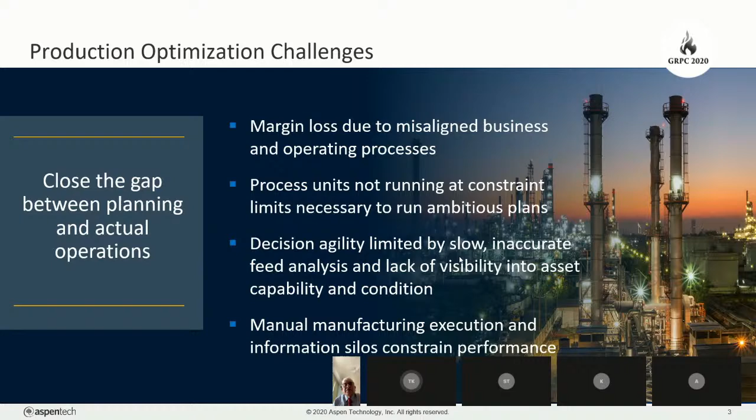For example, we implemented our PIMS advanced optimization platform at a global energy and chemicals company across more than 15 sites. At Rompetrol, we had cumulative benefits of more than $45 million US over a period of 5 years by implementing our advanced process control technology.

So, having said that, I believe there's a gigantic opportunity still to deliver value when you look at production optimization in an integrated fashion.

Let's go to the next slide. So this is our digital reference architecture, a holistic approach to asset optimization.

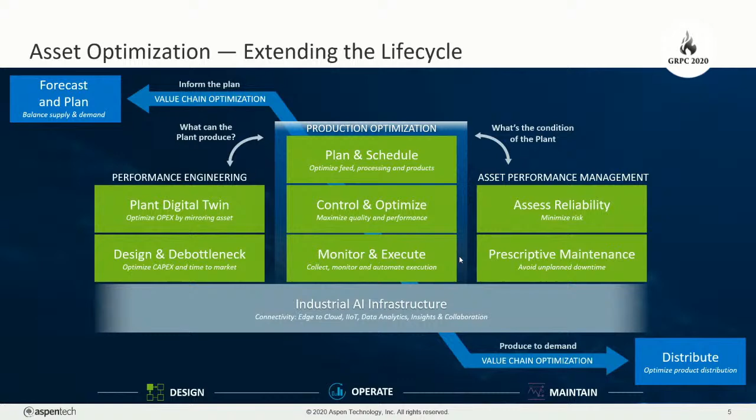And leveraging the new AI infrastructure that AspenTech provides, we believe we can drive new levels of collaboration, but specifically insights and automation across all these functions by providing industrial AI infrastructure to all our applications, so we can help our customers achieve a higher level of asset optimization and ultimately unlock the smart enterprise. But for today, I'm going to focus on the production optimization bit.

And production optimization is really the fundamental building block for a future smart enterprise or self-optimizing plant vision.

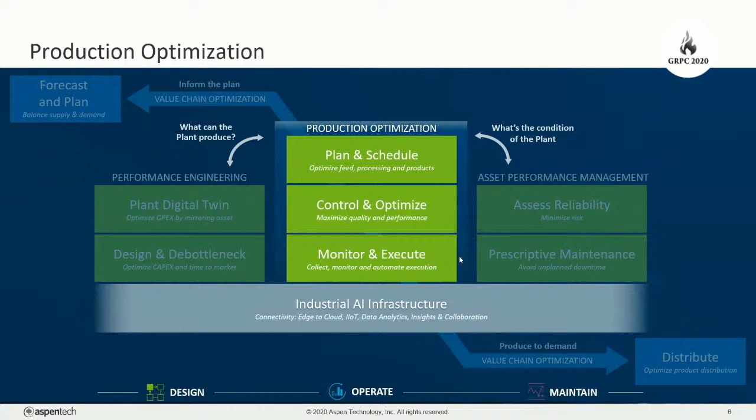So if we look at the production optimization solution, it helps address margin leakage across your supply chain by connecting all of these business processes into an integrated workflow, as you can see here. Our production optimization is a unique solution that provides a holistic, integrated solution that unifies all these different functions.

So when we look at the different layers, the first one is the digital twin. Is your planning model up to date? Do we have the latest representations in our LP? Do we have a tool available that can use machine learning and smart algorithms to provide timely failure alerts?

And that could feed into the planning and scheduling layer, where we do feedstock purchasing and scheduling. We adjust the operation based on day-to-day disruptions, which could be maintenance related, feed logistics, or product downstream delays that could cause the plan to not be achievable, and schedulers then have to re-optimize the plant. That's why we see planning and scheduling hand in hand throughout the operating life cycle of a manufacturing plant.

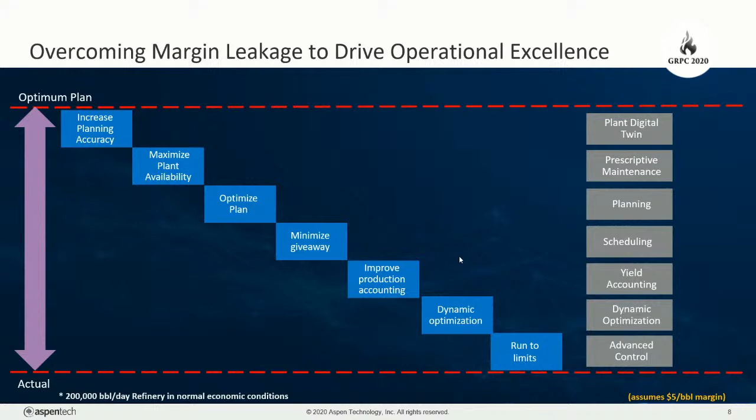This is based on our internal experience with many clients globally, and it's indicative. What you can see, for example, if somebody would not have an integrated planning solution in place, is that the margin leakage could go up to 50 cents a barrel, and the synergy between all these different functions, we believe, drives very high values and goes into the tens of millions of dollars per annum, depending on your complexity and depending on the throughput of your plant.

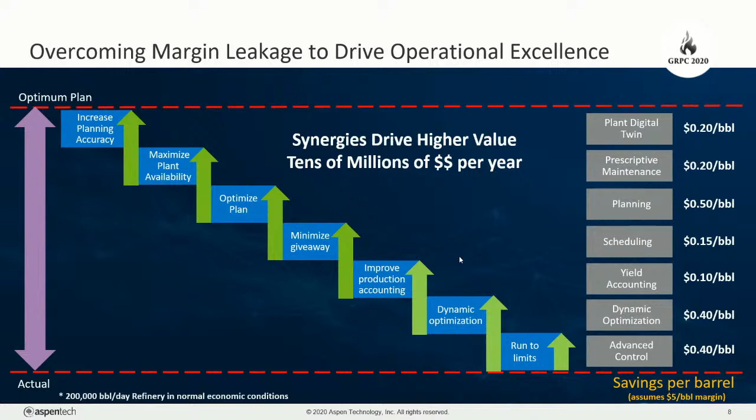Okay. And I think this is a very, very compelling reason to minimize margin leakage.

And this slide, our GDOT solution, it's basically a platform that is used to solve a variety of coordination, but also optimization problems in refining and olefins.

So the GDOT models themselves, they derive from our planning models. So, for example, FCCs, hydrocrackers, reformers. And so the reactor models in GDOT are similar to refinery LP models, albeit that we actually include non-linearity there where we feel that is beneficial, such as a conversion unit, an FCC, or a hydrotreater for that matter. And so they are more detailed models than you would typically find in an LP model.

And for this reason, GDOT actually incorporates best of both worlds. On one hand, it's similar to LPs, but on the other hand, we incorporate more detailed and complex models to accurately represent the units. And as you can see here in the scheme, it's a closed loop optimization.

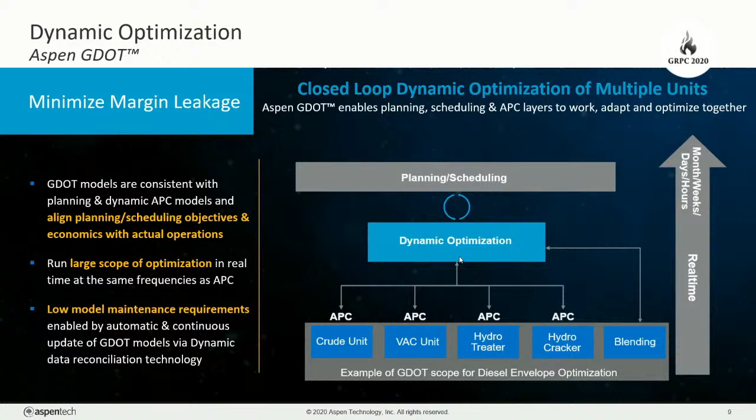Here you see an illustration of our gate-to-gate scope of optimization, and as you can see, here's a middle distillate envelope.

Our solution actually is a flow sheet driven interface with a standard database for different process units, and so setting up these models will allow consistency with planning and scheduling as they are in the same application. These pre-configured templates also simplify the maintenance for the user and allow them to focus on analyzing the results rather than complex model integration.

So what are some of the key success stories? In distillate processing, we've shown to increase overall diesel production by 10% at certain clients, and also reduce the average quality giveaway, and this was worth $4 million to $10 million per annum.

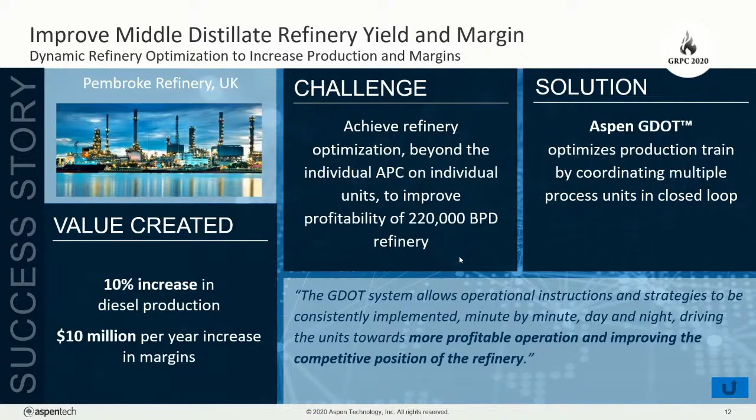Finally, if you remember, I presented the digital architecture earlier, and another key dimension is asset performance management. Unfortunately, today I only have 10 minutes, so very quick.

Actually, with our asset performance management, we can expose the condition of the equipment or process by making prescriptive maintenance information available to the planning department. This enables you to plan interventions ahead of time, to either reduce the maintenance cost or improve the margin leakage that could be caused by an unscheduled event, because you can plan for it well in advance.

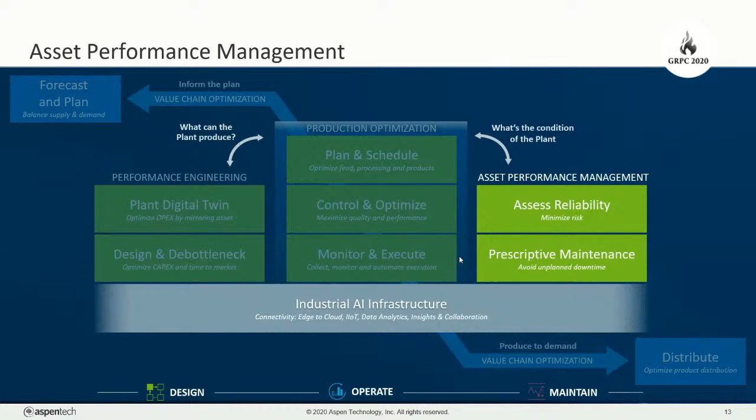An example of that was at Saras. They wanted a reliable operation of their refinery with their integrated power plant, and their strategic objective was to improve uptime but also decrease maintenance costs.

And we at Aspen installed or deployed Mtell as part of this endeavor in just a couple of weeks, and we built failure detection agents across a whole set of critical equipment.

As a result of that deployment of our Mtell solution, which uses artificial intelligence and machine learning to predict failures, we had a 91% detection accuracy with at least 30 days of lead time before a piece of equipment failed.

So at the refinery, one statement was that they positively improved reliability in 91% of the cases, and this led to a reduction in maintenance costs, as well as avoiding emergency or so-called unplanned shutdowns, and they could actually re-optimize their operation. Okay, so that's a very brief overview.

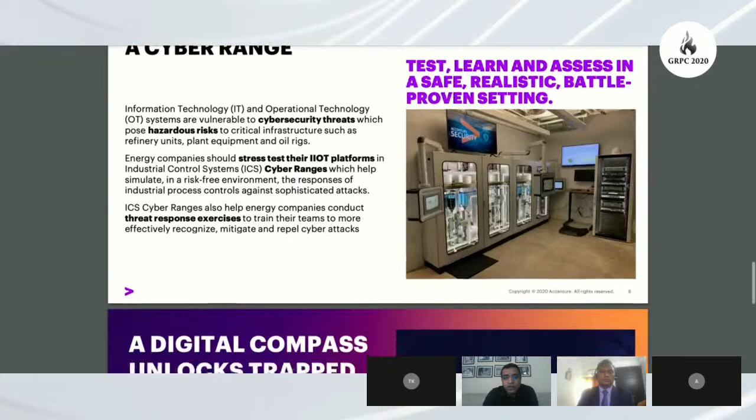I'm not talking about specific use cases, but if we talk of downstream refineries, we have enough proven use cases in process analytics and machine analytics. I'll extend that to even lubricants, where there are applications around developing a platform, either adopting a platform strategy or digitizing existing front end and back end operations. Similarly, it is true for fuel retail and marketing.

What I want to summarize in my last slide is three aspects. One, there has been a lot of progress as far as digital implementation is concerned in the downstream sector. However, what we currently have as proven models is simply scratching the surface. There is a lot more that needs to be identified and invented as far as use cases are concerned. As this technology takes its journey and becomes more mature, we'll uncover more and more. But there is enough to go on to start with, which will give confidence to executives to take the plunge. So that's point one.

Point number two is the digital journey is as much an organizational and cultural transformation journey as it can get. Trusting a digital model beyond your own gut and instinct will take time, and companies will have to really focus on organizational change management, executive sponsorship, etc., for some of these initiatives to really succeed.

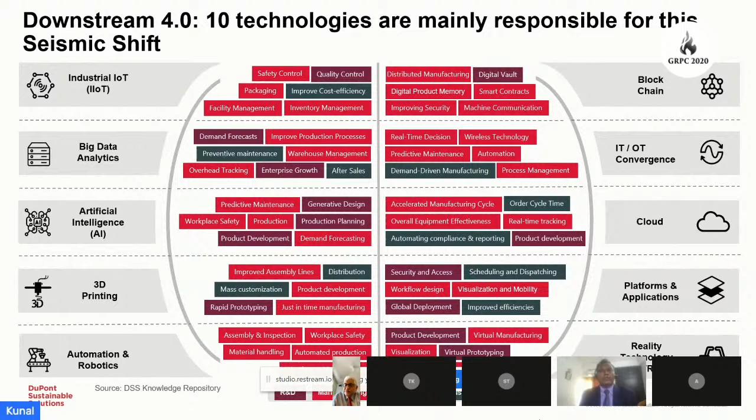And then the why and how part - is that understood even by the management? What are the implications of not transforming, of not adapting to completely new ways, of not taking the bold step to transform the organization? And how to do it in terms of process, technology, and more importantly, people - how to develop a culture of change which is accelerating.

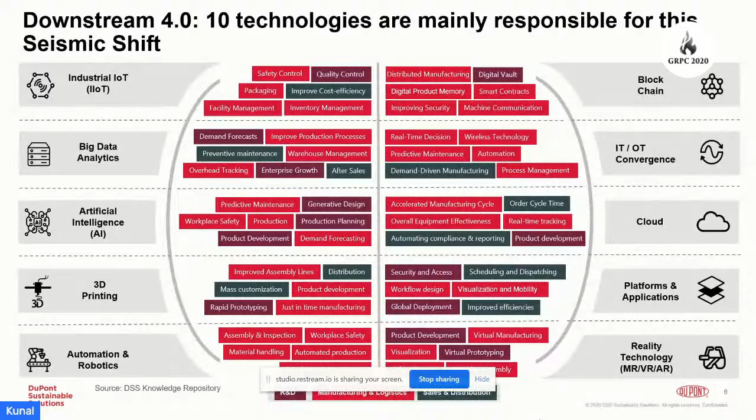A lot of leaders are having a thought around culture and making it one of the key aspects of the transformation that is coming in. Because culture transformation is an implicit part, and often the part which makes success a reality. Without cultural transformation, success can never be achieved.

At DuPont Sustainable Solutions, we leverage the DuPont experience to derive insights on mindset and culture transformation. At DuPont, we have experienced 4 industrial revolutions, starting with mechanical production and to date with the new technologies coming in. And so we derive our best practices, learnings, and methodologies from what we have seen during this course of time and what we have learned and implemented.

In our perspective, there are 3 critical challenges for companies to overcome to achieve the full potential of Industry 4.0 digital transformation. First is a vision and mindset around digital maturity - a lack of digital transformation strategy or roadmap. Is it understood across the organization? Do they have a vision of how to redefine doing new things, with technologies as enablers?

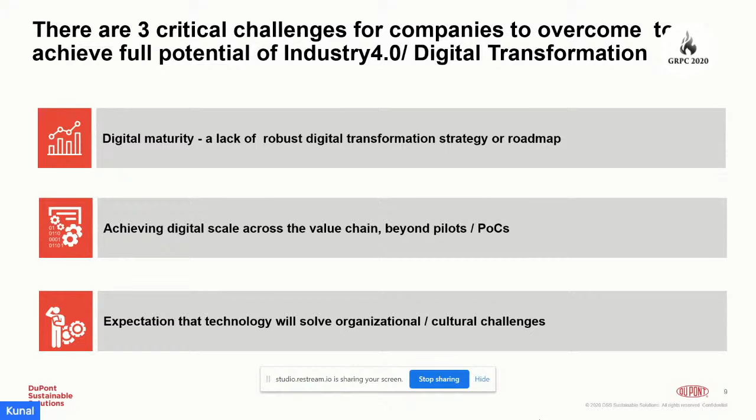I'm taking a case of a digital transformation roadmap for a refinery. It begins with business at heart and people at the center.

First and foremost, across the value chain, we define the critical functions that are there. In this case, we have taken 14 functions, and then we have bucketed more than 50 domains which are there in the organization or refinery under those functions. For example, if we take maintenance and reliability, we have bucketed 5 domains of turnaround, equipment performance, and so on and so forth under it.

Why is it important? Because we need to understand what digital interventions are required in each of these domains, what competencies and mindsets the frontline personnel have in each domain, because they generally are at different varying maturity levels in the organization. What needs to be planned to bring them to a level, and what kind of implementation can be done?

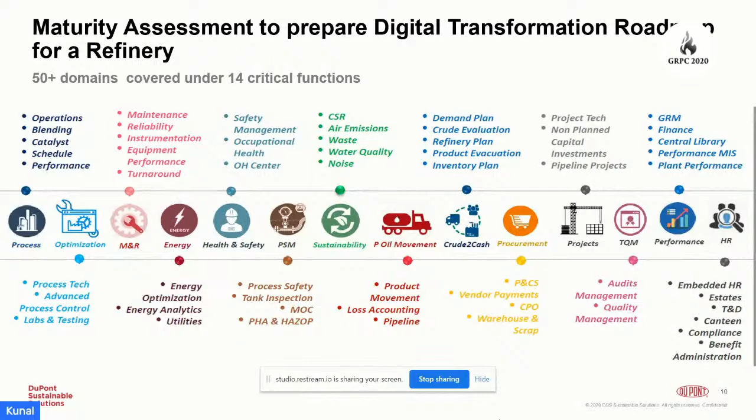The approach we adopt is in terms of process maturity and digital maturity, with the people aspect inbuilt in both process as well as digital.

For example, for a low process and low digital maturity, in an organization where the processes are not really matured, we need to enhance the process, find the gaps in the process, enhance them, and enhance the systems. Accordingly, the competency of the people also needs to be enhanced to that level to make it a success.

Going to the second dimension, high process maturity but low digital maturity in these domains, we need to upgrade the systems and let people know what upgradations are required and how the systems will function.

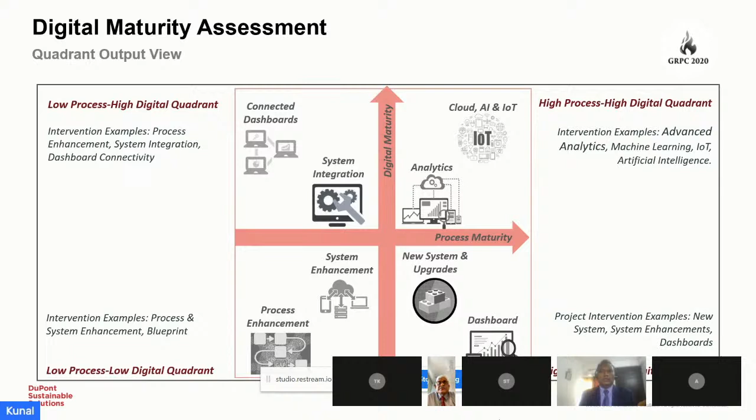Similarly, on low process maturity and high digital maturity, we try to do a system integration, a dashboard connectivity, so that people can understand how things are integrated and enable the functioning of the processes accordingly with the digital maturity available. The final quadrant of high digital maturity and high process maturity requires significant efforts in terms of competency building and deployment of technologies, be it advanced analytics, machine learning, Internet of Things, or artificial intelligence.

After doing this whole piece, assessing each domain onto this methodology, we also do a business criticality assessment of each of these domains in terms of how critical it is from a business standpoint, so as to prioritize the investment in implementation.

We do an assessment including people as a part of both process maturity and digital maturity, and then by talking with people, getting their views, and understanding from a business standpoint, we give a business criticality score to each of these. We then define the interventions required in each domain under a particular function, going across for all functions and then enterprise wide across the value chain.

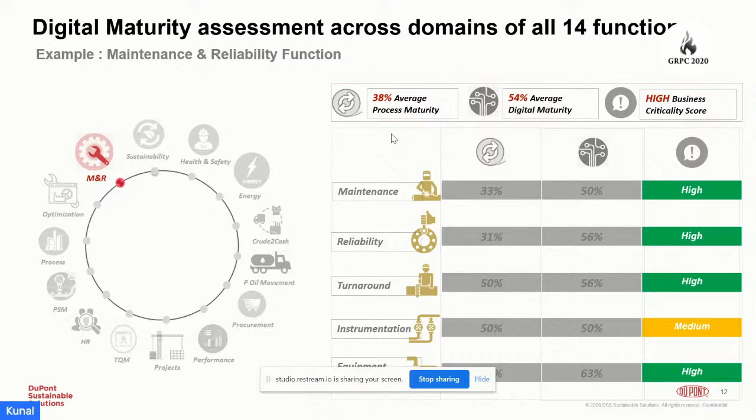To showcase an example of how the digital interventions are done and plotted: in the maintenance and reliability function, a total of 15 challenges were identified along with the people in that particular function.

Then 7 digital interventions were... Hello, Kunal. Yeah, this is your chairman speaking, session chairman speaking. Could you please wind up in another 2 minutes, because we are... Sure, I'll go a bit fast. Yeah, please. Thank you, sir.

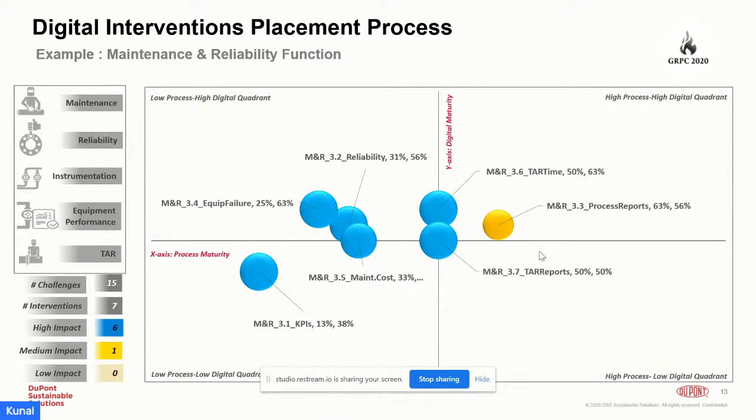So then we placed around 7 digital interventions, 6 of which had a high impact on the organization and 1 had a medium impact, be it turnaround time, process reports, and so on and so forth.

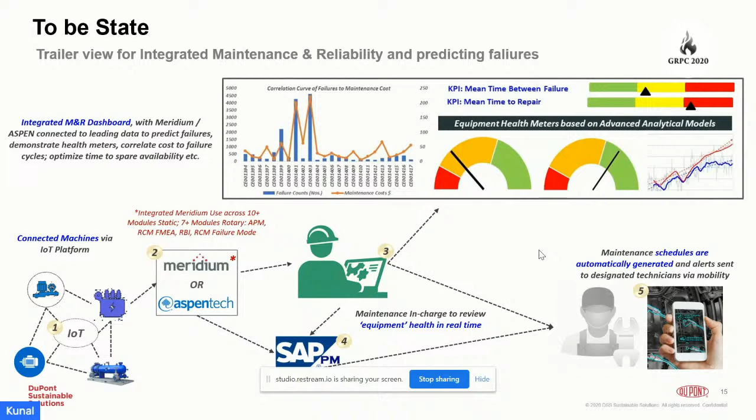From a digital assessment perspective, since we took the case of maintenance and reliability, the suggestions for IoT came up - integrating them with the asset management software so that the maintenance in charge can get equipment health in real time through KPIs, demonstrated health meters, correlate cost to failures, predictive failures, and frontline maintenance personnel can automatically get generated schedules and alerts to take action.

We did it across all 14 functions and gave a business criticality score for prioritizing investments, then developed a roadmap addressing three challenges: the complete vision, the scalability across all levels in the organization, across functions and across the value chain, and third, building a competency roadmap for the people to achieve that. With that, I'd like to end my presentation in the interest of time.

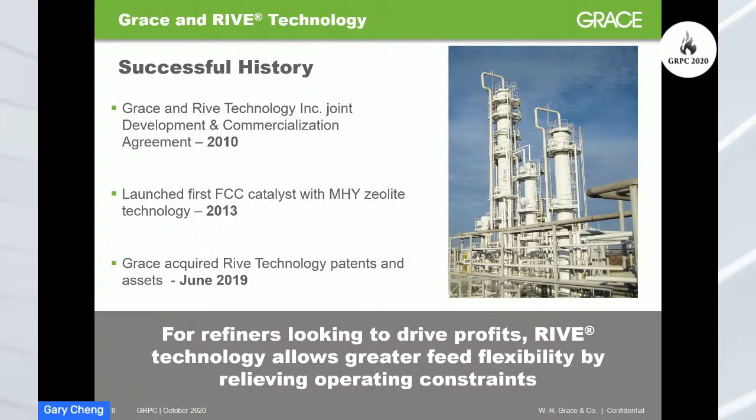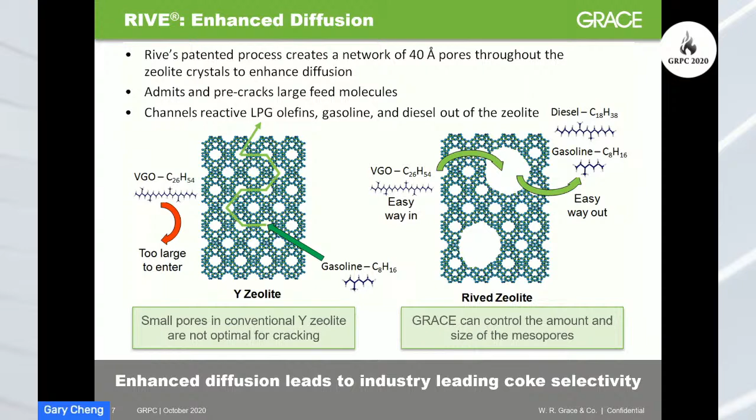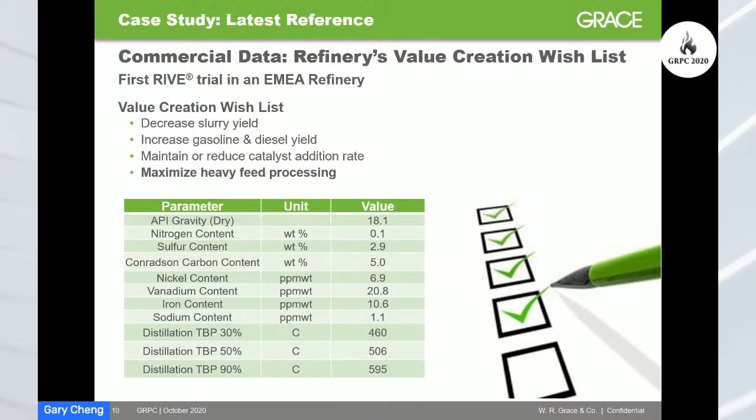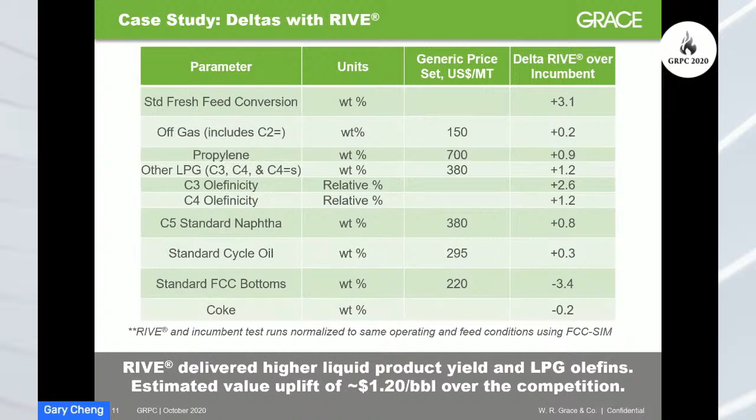So looping back and tying back to the inaugural session and the panel discussions, there was repeated mention of sustainability. This is a key topic in today's world.

While Grace is making advancements in sustainability in many facets at our own manufacturing facilities, as well as our products, one key product technology for our customers is Rive, as it offers the lowest coke make per unit of conversion of FCC feed. Rive Catalyst provides refiners the ability to overcome traditional unit constraints, such as wet gas compressor, regenerator bed temperature, etc. Rive offers the ability to have the lowest dry gas make in industry, process unconventional feeds such as bio oils or unconventional streams, and overall offer the best coke selectivity in the industry.

As mentioned in my earlier slide, while we talked about Rive technology and catalysts, we're also very excited to share some news about a recent trial for Zavanti, which is the latest additive available from Grace. Again, this is the first public forum where we're sharing the story, and I hope you find it interesting.

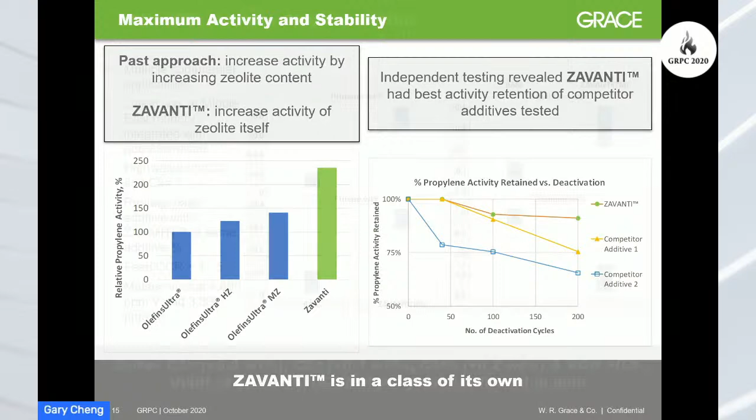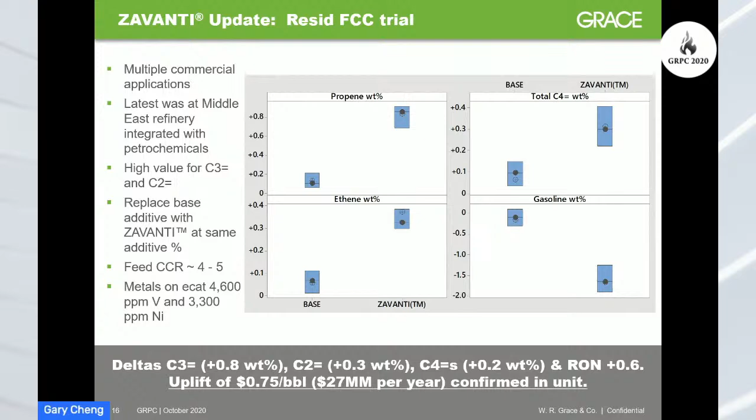So in summary, I hope you were excited to hear about some of our latest catalyst and additive technologies. Grace continues to innovate. This is our bread and butter, this is what we do. We're dedicated fully to the catalyst space. We've introduced some breakthrough technologies in recent years, including Rive and ZAVANTI. And as shown in the previous case studies that we've presented here, refiners have really capitalized on these technologies and been able to significantly improve the profitability, especially for max propylene operations. So with that, I thank you all for your attention, and I'll turn it over to our chairman.

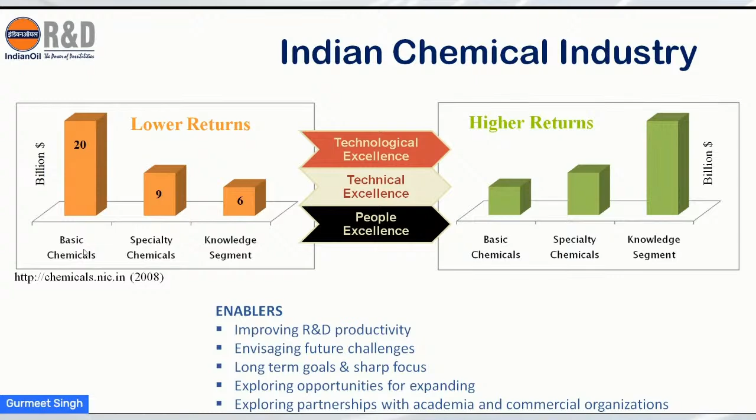If we talk about innovation, we have a very beautiful R&D center at Faridabad, and you are welcome to visit it sometime. It is on the south side of Delhi, around 35 kilometers from the Delhi center.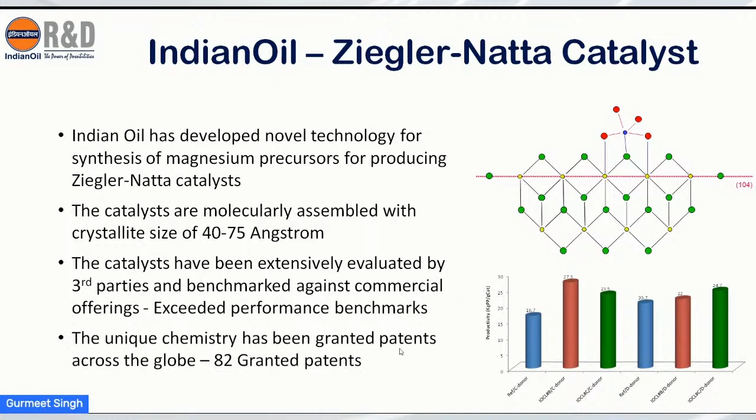82 patents have been granted based on this unique chemistry, and we have extended this chemistry to other fields also.

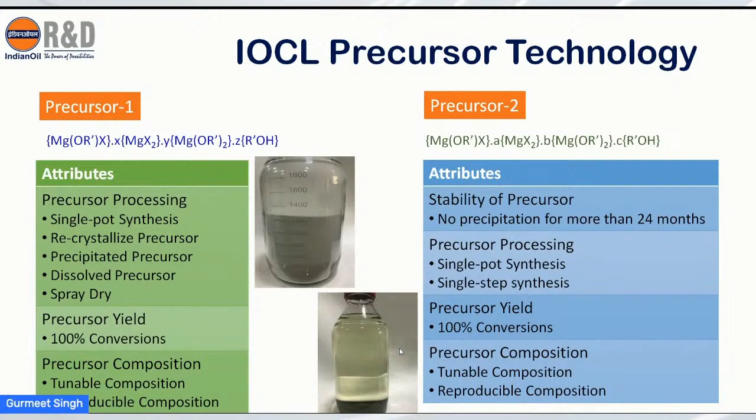We have developed two different precursors unique to IOCL, and they are patented. They have given us the right catalyst systems for polypropylene. These are a few of the parameters which we have identified, and the catalyst systems were benchmarked by a third party.

This is the data from a Norwegian company. In productivity benchmarking and other aspects like donor response and hydrogen response, our catalysts were found to be superior over commercial offerings.

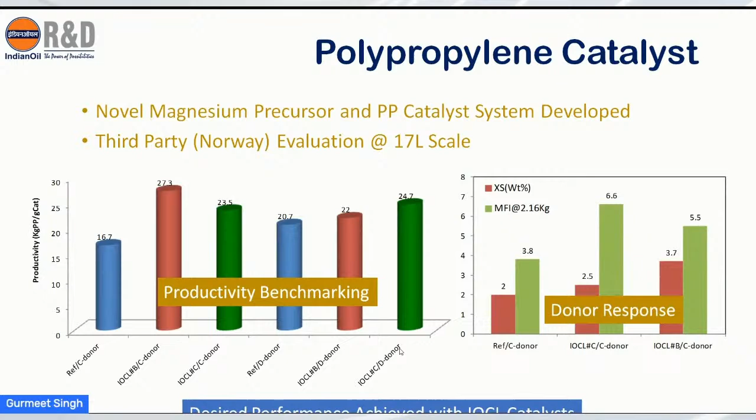We have also extended this precursor technology to polyethylene catalysts. These catalysts have been evaluated extensively in-house and by third parties, and have exceeded the productivity and hydrogen response figures of any commercial catalyst. Both catalysts are now under commercialization.

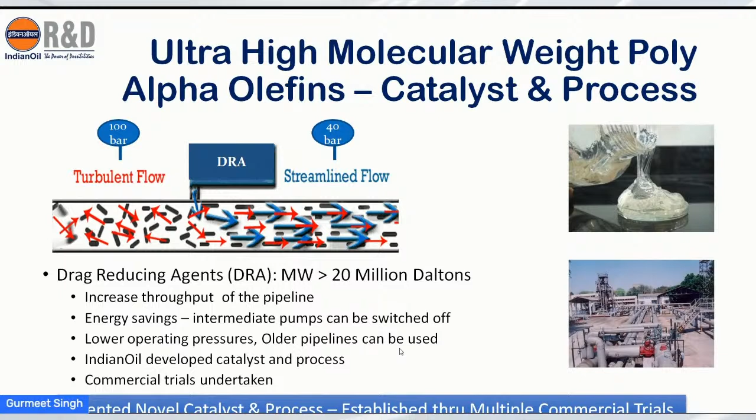We extended the same catalyst technology to produce an entirely different class of polymers, drag reducing agents, which have very high molecular weight of more than 20 million daltons. We were able to make this product using alpha-olefin polymerization. This product has been tested at pipelines and given excellent results. After multiple commercial trials, the technology has been established. We have got a patent on this technology, and currently it is under commercialization.

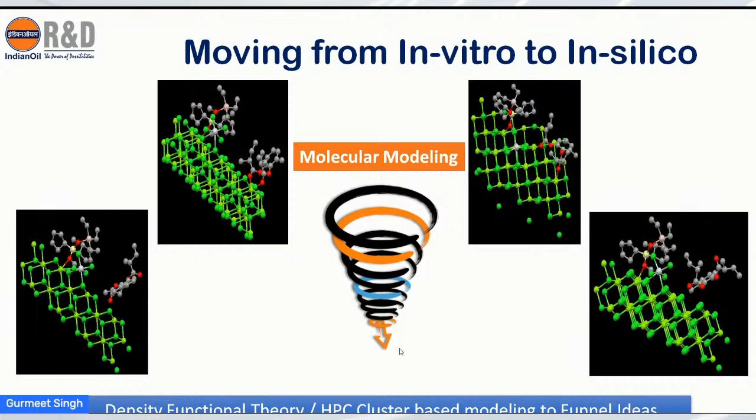Now we are also moving from in vitro to in silico, and we have established molecular modeling at our end. We are using density functional theory models with HPC clusters, high performance computing clusters, to funnel ideas so that we don't have to do a lot of bench work. If we have 100 ideas, we can build 10, and only those 10 ideas are extended to actual bench work.

In conclusion, our research foray into petrochemicals is purely based on innovation. We are not building upon others' patents or knowledge; we are creating knowledge. We have developed robust precursors using state-of-the-art technologies like parallel and automated processes.

Both precursors have been established for the production of high activity, high productivity, high stereo regularity catalysts for producing polypropylene and polyethylene. Both catalysts have shown excellent performance with the desired product characteristics, which is also very important. Application of molecular modeling has been initiated to understand performance and funnel ideas, and all our innovation is extensively protected.

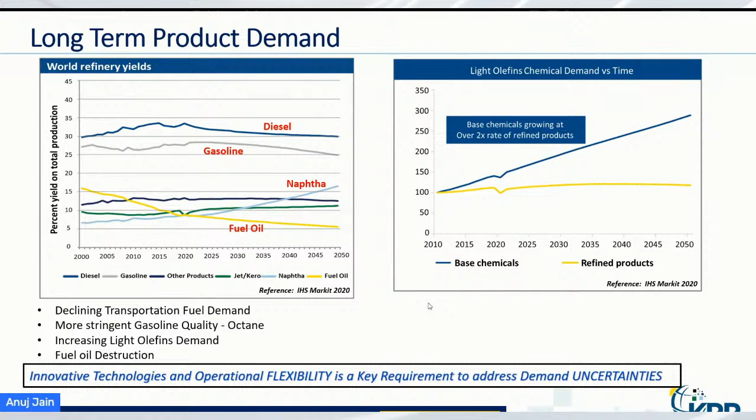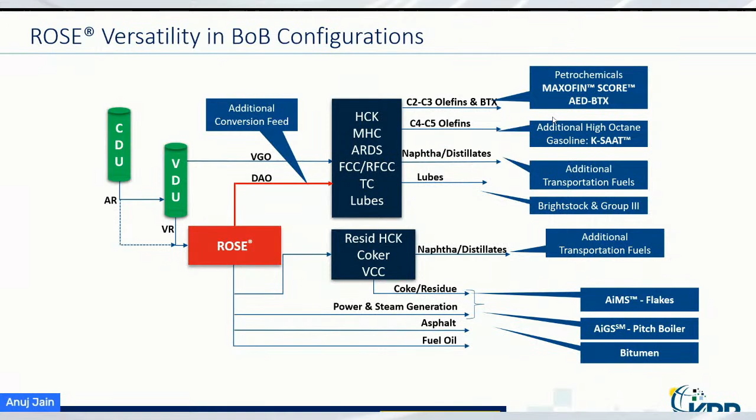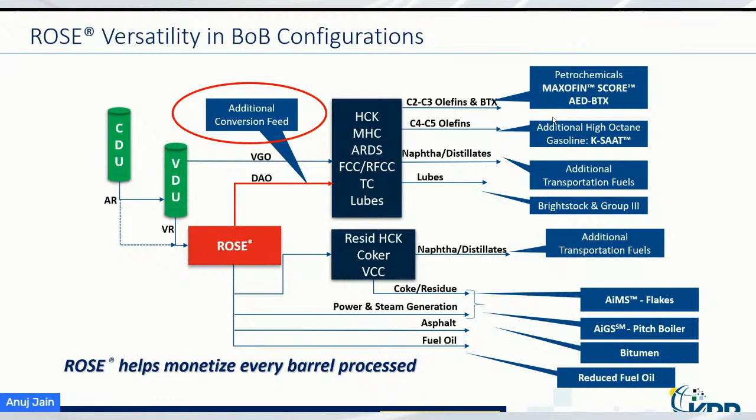This pitch can also be used for making bitumen, and with all this, we are going to reduce fuel oil generation. Overall, with the ROSE unit, we can monetize every barrel processed in the refinery. There are several solutions available, and we have a commercially proven scheme for pitch and residue handling in the refinery.

I'm going to talk about FCC. KBR is a pioneer in FCC technology. KBR developed the world's first known commercial FCC unit at Louisiana in 1942, and also designed some of the first VGO and resid crackers. Since then, KBR has executed more than 120 grassroots units.

If you see the timeline from 1942: in 1961, we came up with resid FCC. Then in 1998, Maxofin, which is mainly to produce propylene. And in 2006, we came up with a new disruptive technology, which is K-COT.

In this technology, we can use C4, C9 olefinic streams, and the reactor we are using is the same reactor which is in FCC, with some changes in risers, temperature, pressure conditions, and proprietary catalyst. With this, we can produce more propylene than ethylene. K-COT can be integrated along with a cracker and also as a standalone unit in refinery and petrochemical configuration. This is a quite unique technology, giving more propylene than ethylene, with a ratio of up to 2:1.

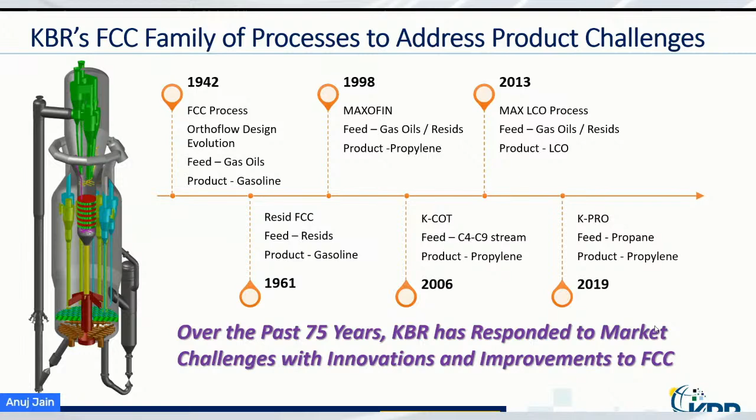Another technology I would like to talk about: as we move towards stringent environmental norms, more and more hydrotreating is being done. Hydrotreating reduces sulfur, but at the same time it also reduces octane. So KBR's solid acid alkylation technology, K-SAAT, maximizes the yield of motor fuels and enhances production of an ultra clean blend stock, which is alkylate.

If we quickly go through this process: the feed is basically C2 to C5 olefins together with isobutane, and in presence of a unique solid acid catalyst, we can produce alkylate in the reactor. It's a 2+1 reactor scheme, where 2 reactors are in operation and 1 reactor is in standby for regeneration.

With this, the alkylate we get from this unit is of higher octane than that obtained by any other liquid or solid acid catalyst under a wide range of process conditions.

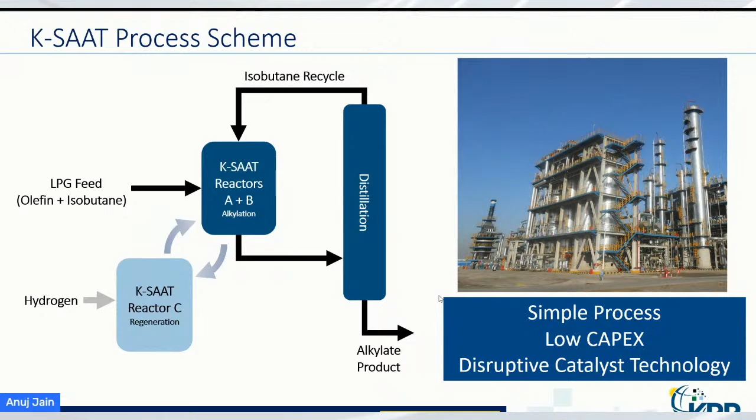It's a simple process, low capex, and we can look at a few key advantages of this process. Basically, it is very flexible to process C2 to C5 olefin feed, and the catalyst is proprietary from KBR and is precious metal free. It is basically a zeolite based catalyst, so very good from an OPEX and environmental point of view.

We have a complete modularized solution for this unit, so the unit is very compact with fewer pieces of equipment than any other competitive technology. And the catalyst has a 5-year guaranteed life.

The regeneration cycle required is more than 24 hours, but the actual regeneration time is quite less, almost 12 to 16 hours. This technology is also commercially proven; we have references, and many projects are in the pipeline in the design phase.

I would like to touch upon another technology. KBR introduces MAX-ISOM as a technology innovation for low-cost production of high-octane isomerate gasoline. It is highly flexible and compact with low energy requirements. As you can see on the screen, it's very compact with a low number of equipment.

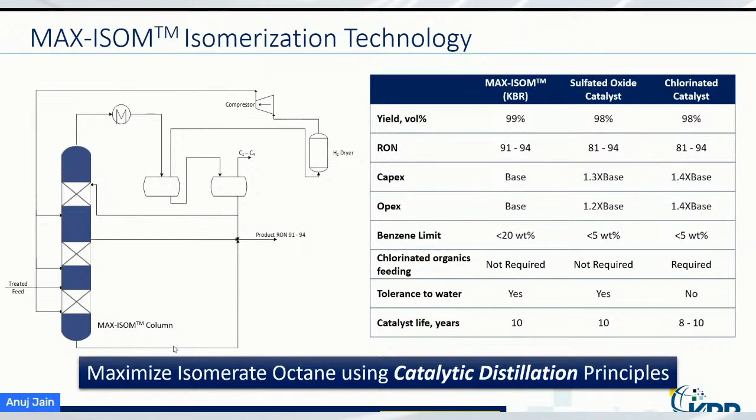We can look into a few other key features of this technology: high selectivity, lower capex or opex, and lower footprint. As we have seen, there's a very low number of equipment involved in this technology.

MAX-ISOM fits for both grassroots and revamp schemes. The revamp option also has very low capex incentive, and it can be implemented with any of the available technology. It's a more efficient process for maximizing octane.

It can process C5 to C7 feed, with higher limit on benzene and high tolerance to contaminants, as I said earlier. I've shown only one scheme on the screen, but there are many different configurations that can be tailor-made to a refiner's need.

Commercially, for this technology we have a pilot plant running, and a couple of plants we have designed. One of the plants actually has equipment ordered, but construction is currently on hold. So as of today we don't have a running reference, but we are in discussion with a lot of clients to come up with a unit very soon.

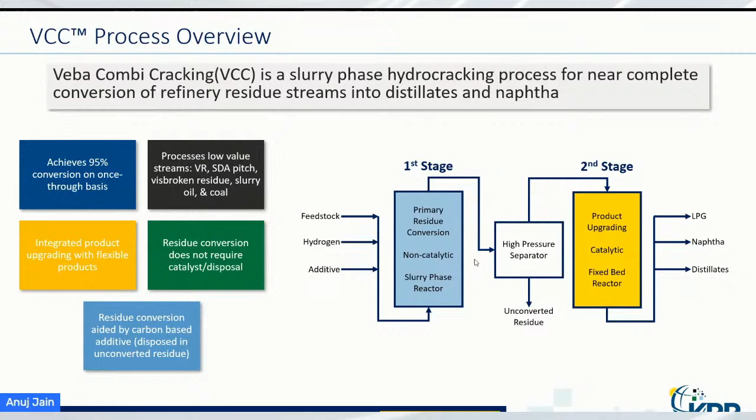From the low value streams in the refinery, we can get LPG, naphtha, and distillates. So it's a very optimized and very unique technology with us.

The key advantages of this technology: again, very high feed flexibility — you can put any low value stream, any kind of residue. No catalyst is required for the first stage, as I just mentioned. Of course, high conversion, 95% and above.

VCC technology is also commercially proven. We have one running reference unit with refinery residue, and two units running with coal and other residues.

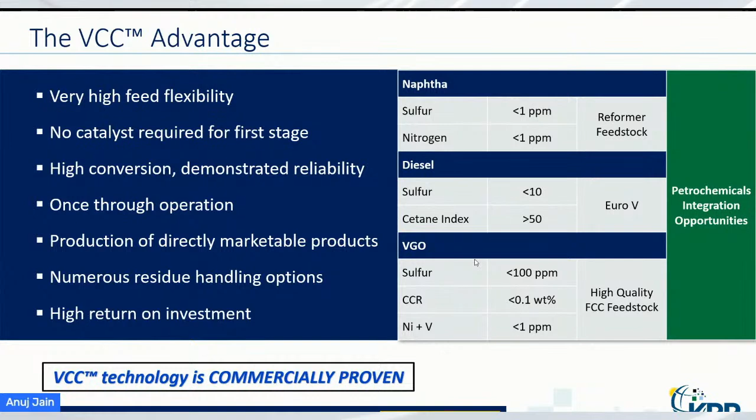Just to sum up my presentation today, I would like to cover some bullet points. Technology innovation is a continual process with a long-term technology landscape. We need to look beyond what is new to what's next. Innovative technologies and operational flexibility are key requirements to address demand uncertainties.

We expect that residue upgrading, steam cracking, and product upgrading technologies like alkylation will be the focus for adaptation and essential to survive in the future refining market. KBR has some innovative technology solutions to address refiners' challenges. Thank you.

Thank you, Anuj, for your excellent presentation on the new configurations that are available — mainly ROSE, VCC, your propylene maximization, and MAX-ISOM technology using catalytic distillation, and finally modularization. All of this will go a long way in creating innovative solutions for refiners.

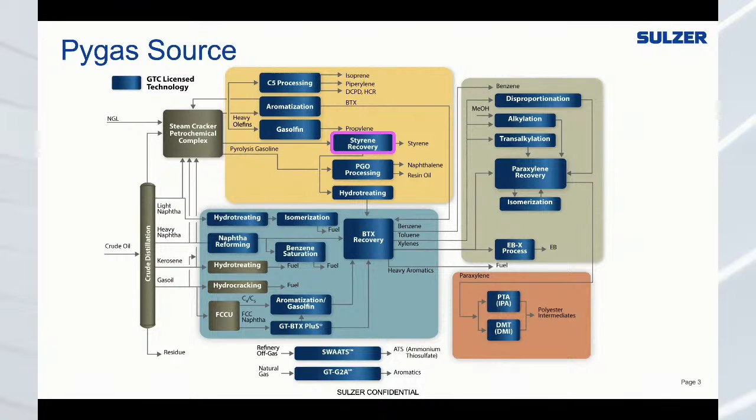Normally in a cracker, C6-C8 pygas is hydrotreated, then extracted to produce benzene, toluene, and xylene. In this case there is no production of styrene, and any styrene present in pygas gets saturated in this hydrotreater. It is very important to maximize the value of pygas based products, because these cracker complexes have to compete with gas based crackers where the yields of ethylene and propylene are much higher.

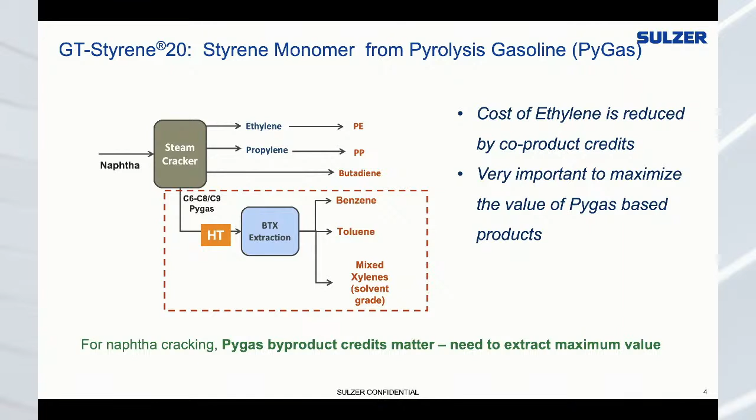Unless we add value to these pygas byproducts, these crackers will not be competitive with other world scale crackers based only on gas. This valorization can be further improved by extracting styrene from this stream. Styrene can be produced if we take this C8 heart cut to recover styrene, and raffinate is recycled back to the hydrotreater, with the rest produced as in the conventional configuration.

So it's a very good fit here. Once we take the styrene out through this extraction, it upgrades the xylene quality—mixed xylene of isomer grade is produced, whereas without this extraction it is solvent grade due to high ethyl benzene content. At the same time, recovering styrene reduces hydrogen consumption in the hydrotreating unit, and there are other advantages in operation. So this way we add value as well as improve performance in processing of the C8 cut.

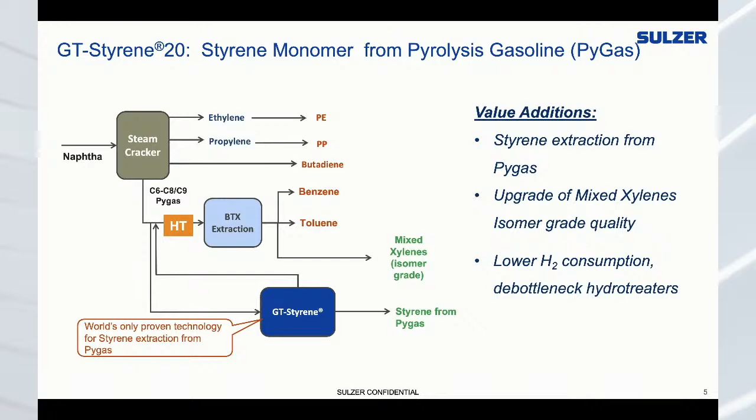For a steam cracker, a 1 million ton ethylene liquid feed cracker has a potential of up to 35 kTA of styrene monomer. Historically, this styrene recovery from pygas was not considered because the right technology was not available, and ethylene crackers were not large enough to produce styrene at economic scale. Typically, a 1 million ton cracker can give us sufficient size to produce styrene on an economically viable scale.

To extract this styrene, it has to be separated from a mixture of paraffins, olefins, diolefins, aromatics, and aromatic olefins, and these are all close boiling.

The styrene molecule boils at 145 degrees centigrade, and comparing to other molecules it's very close—136, 144, 142, 139, 152. So recovery of styrene through simple distillation is not a feasible way.

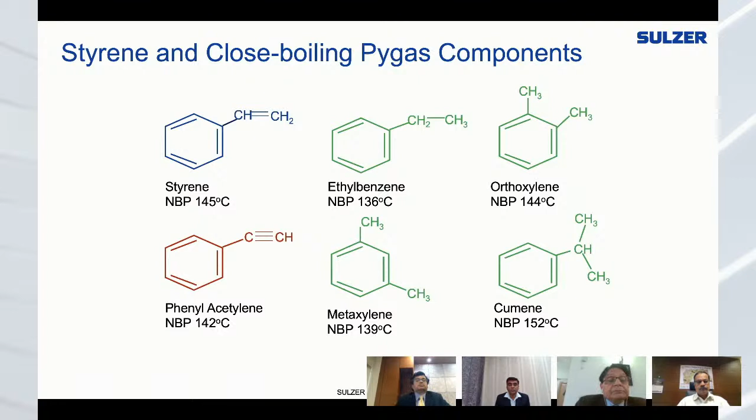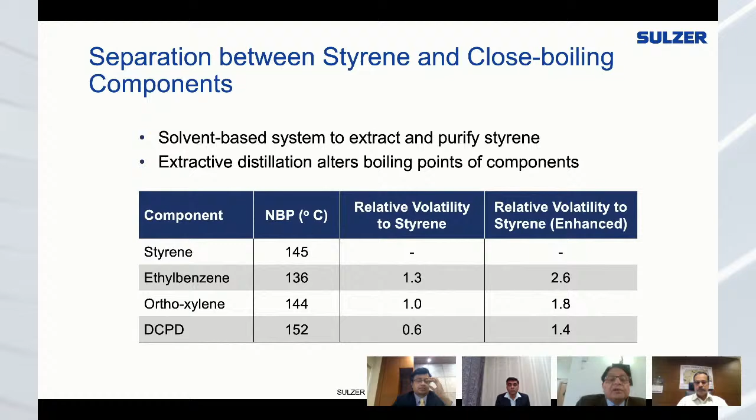This gives the idea about the relative volatility of styrene with respect to other competing molecules from which it has to be extracted. With distillation, relative volatilities are of the order of 1.3 or 0.6 in this range. However, with extractive distillation in the presence of solvent, we alter the relative volatility significantly, making it possible to produce styrene from the C8 pygas cut.

So to alter the volatility, a large increase in relative volatility is essential. It has to be done in the presence of a solvent. That's why it is extractive distillation, and Techtiv-200 is the solvent used to alter this relative volatility and produce styrene.

Solvent should be thermally and chemically stable and must be conveniently separated from styrene. Through intensive research and process development, Sulzer GTC has designed an optimum solvent blend, Techtiv-200, customized for this styrene process.

Separation of styrene monomer from close boiling components using Techtiv-200 is still the core of the process. This process GTC has been licensing, and already 3 units are commercially operational. The core process still remains the same: extractive distillation using Techtiv-200.

It includes post-extraction. Finishing includes 4 different processing steps. One can produce styrene in conventional way using Techtiv-200, but it requires 4 different steps which has to meet color requirement, sulfur requirement, oxygenates, heavy and polymers. So these 4 steps

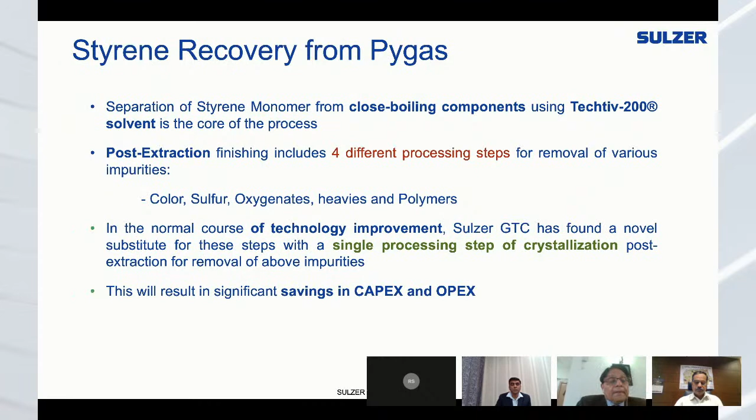Next slide. If you see, the first generation process: pygas C8 heart cut with phenylacetylene was hydrogenated, and then the extractive distillation step, extract EDC, as well as solvent regeneration. From this, extract is subjected to purification steps, which include color removal, oxygenate removal, and sulfur and heavies removal, to get 99.8% styrene monomer.

Next slide. Actually, if you see, styrene purity as required is achievable here, which is 99.8%. But to meet other specifications of the styrene, these polishing steps are required to convert to the marketable product.

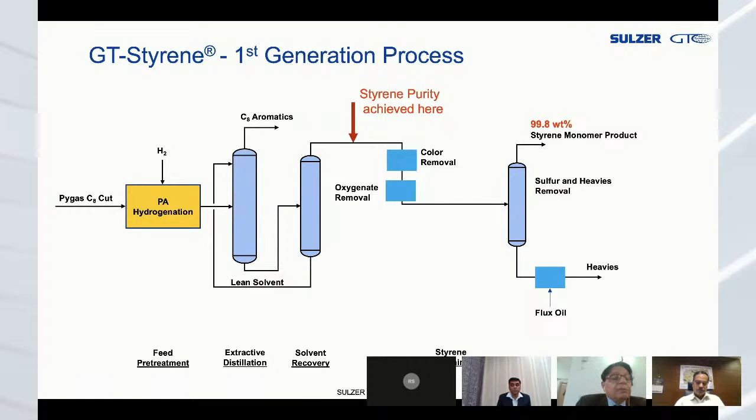Next slide. This ASTM D2827 specification for styrene basically requires 99.8%, but at the same time, these are the color and other specifications which have to be met, and those polishing steps are there to basically meet all these specifications.

Next slide. In this GT Styrene 20, the second generation current extraction process, all those polishing steps have vanished and been replaced by one crystallization based process. This is a fractional crystallization which allows to achieve ultra high purity styrene, that is 99.95%. In the previous generation we were talking of 99.8%.

Other advantages are a new approach for final purification of the styrene: one step crystallization versus multi-step processing. The crystallization makes an ultra high purity product meeting all the specifications. Nominal purity is of the order of 99.95%, and total sulfur of less than 5 ppm is possible.

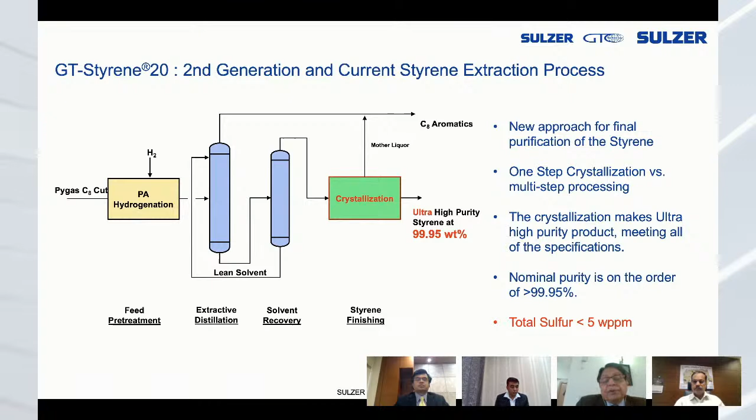Next slide. In the next generation, all those steps are avoided, and we can produce, using fractional crystallization, the ultra pure styrene meeting all the specifications. If you are interested in more details about this fractional crystallization, in our booth there are brochures available. You can go through that and get an idea.

This is already a commercialized step for other applications, and these crystallizers are from Sulzer. As you know, Sulzer has acquired GTC in the last year, and after this acquisition, all those technologies are merged, and this is the innovation which I am presenting right now.

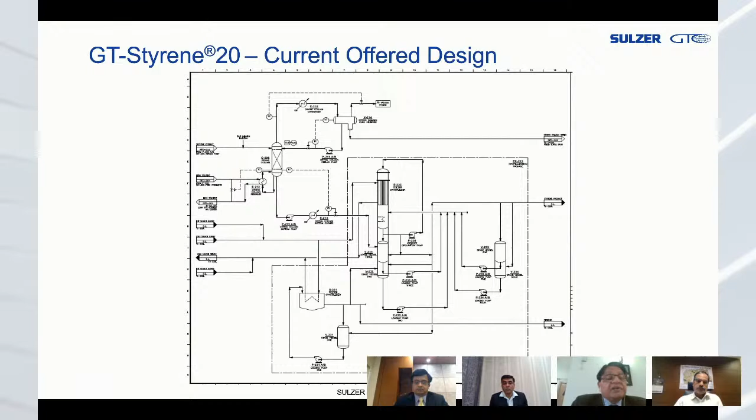So with this step, the advantages are lower equipment count because many steps have been removed, lower capex, lower opex. The electricity can be replaced if we can use ethylene from the cracker plant as a cold source for the crystallization unit. A smaller plot area, opportunity to relax operation of DC8 and other operations,

phenylacetylene SDT as well as EDC. We can operate at relaxed conditions because most of the impurities will be taken care of by the crystallization. Ultra high purity product, lower sulfur specification for styrene product can be guaranteed subjected to the neat feed sulfur.

The purification section design with crystallization is commercialized. This purification section is already commercialized for a different application. It has no moving parts, no filtration of crystals, no use of solvents. It's a very simple and well proven step for crystallization. Thanks. Next slide.

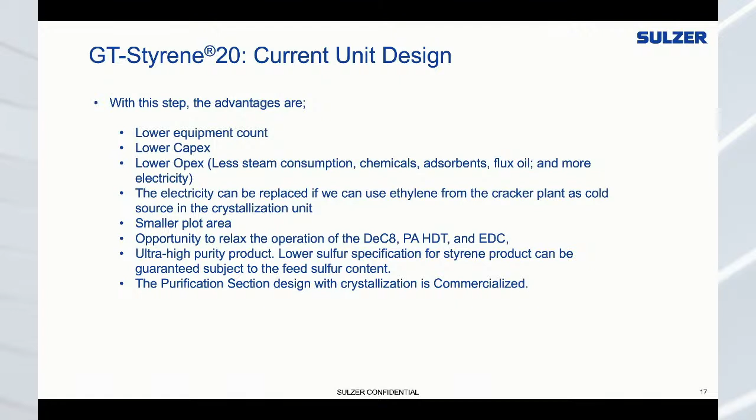This styrene recovery fits well into a naphtha complex, where we can take out the C8 cut, recover the styrene, and recycle the raffinate to the first stage hydrotreater. This recycle brings the advantage of extended catalyst life.

So today I'm going to talk about olefin conversion technology, which is basically how to make propylene in a sustainable manner, and how to have the flexibility to make this propylene.

Just a brief overview before we delve into the topic: Lummus Technology. Lummus is an over 110-year-old organization, and we are a premier licensor of refining, petrochemical, polymers, and gas processing technologies. We supply catalysts and proprietary equipment as well. We offer over 130 plus technologies, over 2,400 licensed units, and lots of patents. The big change that happened to us was this year, as of July 1st, Lummus was acquired by the Chatterjee Group and Rhone Capital, and now we have become a standalone technology licensing organization. So you can see our logo also looks different now.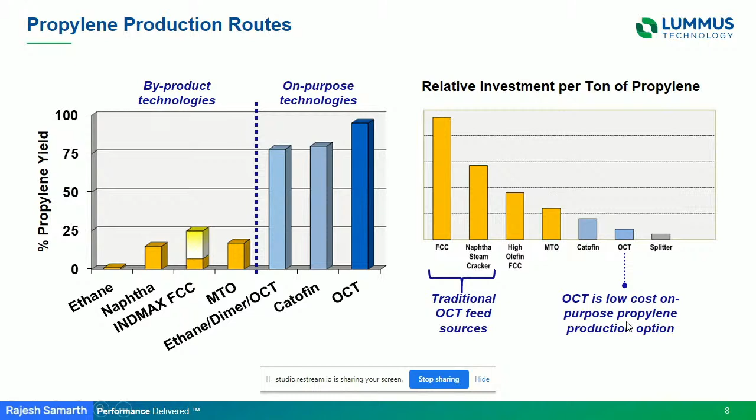As opposed to that, let's talk about the on-purpose technologies, the biggest of which is Catofin, which Lummus offers, a propane dehydrogenation technology that gives a very high yield—you can see it gives 75+% yield. As opposed to that, all these byproduct technologies have yield much less than 25%. If you go to OCT, the yield is even higher, and there is another version of it, which is ethane dimer OCT, which we'll talk about. But ultimately, for the on-purpose technologies, the investment cost per ton of propylene produced is significantly lower.

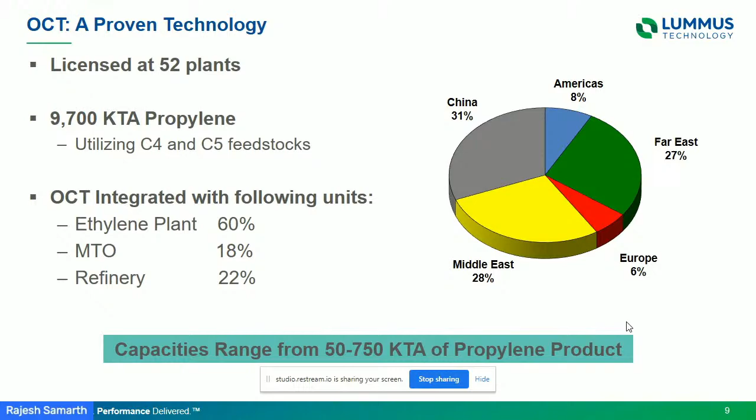Now, OCT is a commercially very well accepted technology with 52 licensed plants. There is almost 10 million tons of propylene capacity using C4, C5 feedstocks together with ethylene for production of propylene around the world. You can see vast majorities of those are in ethylene plants, but there is over 20% in refinery applications as well. The majority of the units are really in China, Far East, and the Middle East. There really hasn't been an OCT unit in India yet, but hopefully the time is right now. The capacities of these units range from 50 at the low end, to 750, which is the largest size OCT unit we have designed.

So, a process overview. The process is actually very simple. It is the standard metathesis process where you react normal butenes with ethylene to make propylene—so a C4 plus C2 makes 2 C3s. Among normal butenes, the reactive one really is 2-butene. But what happens in the process is 2-butene and 1-butene are in equilibrium. So as 2-butene gets consumed in the process, 1-butene isomerizes to 2-butene under equilibrium, and you can drive the reaction. So the feedstock is basically either 1-butene or 2-butene, although 2-butene is in a way preferred.

There is another version of it, which is C5 metathesis, in which you can also react normal pentenes with ethylene. So a C5 plus 2 ethylenes—a normal pentene C5—that'll make 3 molecules of propylene. Isopentene will also react with ethylene, but there will be a byproduct of isobutene.

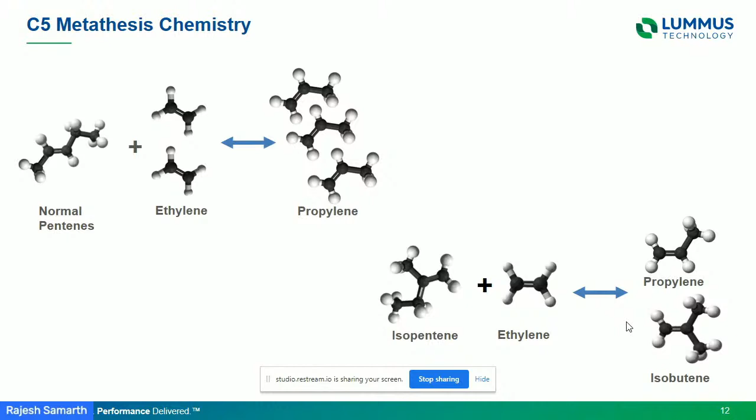So OCT actually is a very simple process. The first step is the purification of the feedstock. It's a catalytic process, so some of the bad actors such as sulfur, moisture, and some of the highly olefinic and diolefinic components have to be brought down in concentration. So that's the first step.

The second step is just the reaction that we talked about. And then the third step is separation of the products. That's also a very simple step, essentially two distillation columns in which you are separating the C2s from the C3s, and C3s from the C4s. And C2 is recycled, C4 is also recycled, with a purge of some of the heavier byproducts which are produced.

So if you just look fundamentally at this process, there is very low energy consumption in the process itself, because all other processes for producing propylene require some kind of cracking, whether you look at steam cracker, FCC, or even dehydrogenation. There you need to provide a lot of energy, but here this metathesis process is essentially energy neutral between the feed and the product.

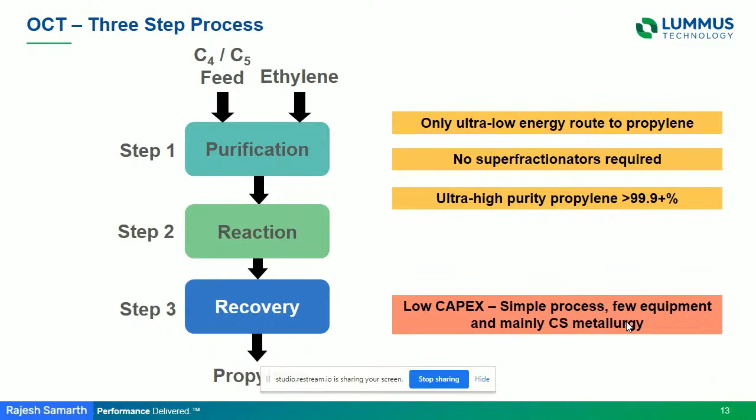Because really what you have is you are making propylene, there is no propane, so there is no superfractionation required, and you can produce very high purity polymer grade propylene easily. It's a low pressure, relatively low temperature, simple process, so few equipment, all predominantly carbon steel metallurgy, which helps having a lower investment cost.

Now let's talk about how this process can be integrated with a cracker. So this is just a typical naphtha cracker configuration that I've shown. From naphtha cracker, you are producing your light products, which has ethylene and propylene. Then you have raw mixed C4.

Typically, most of the time, you will have a butadiene extraction, and then the raffinate one from that. Many places in the world, you will do the removal of isobutene - MTBE is one of the examples. Then the raffinate 2 is returned back to the ethylene plant, oftentimes it's hydrogenated and then returned back. The same kind of thing happens with the C5s - the C5 pygas, you are doing hydrogenation of that and returning it back to increase the production of ethylene and propylene.

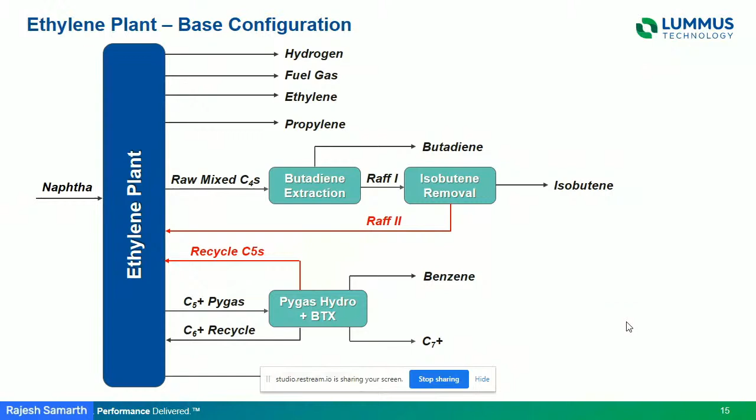So here, both C4s and C5s will react with ethylene to make propylene. And any of the byproducts can be recycled back to the naphtha cracker. So you can see it's really speaking a simple add-on to the existing naphtha cracker.

Now, if you actually put in an OCT process, what you can do is operate your naphtha cracker at a much higher severity. That will allow you to go with a lower ratio of P2E of 0.5 - a lot more ethylene production. But with OCT, you can bring the ratio back again to 0.65.

But what's the advantage? The advantage is when you run a cracker at a very high cracking severity, the consumption of your naphtha feed actually goes down. And actually some of the high value products like butadiene and benzene, their production also goes up at high severity.

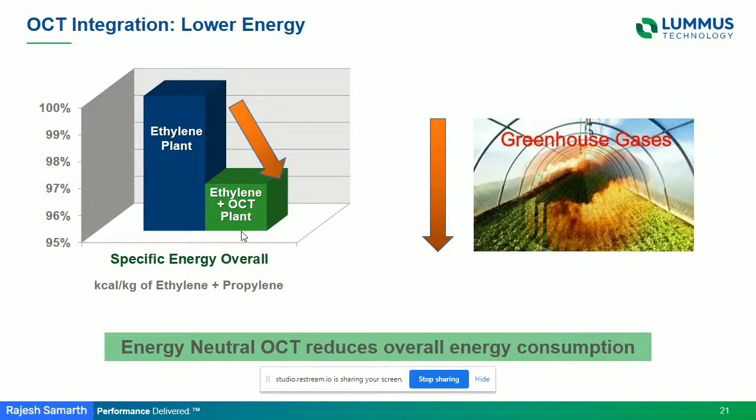So this graph shows the specific energy consumption of an ethylene plant. You can bring down the specific energy consumption of the ethylene plant with the addition of OCT. This is kilocalories per kilogram of ethylene plus propylene produced, and that is again achieved by operating at a higher severity, but reducing either the amount of feed or producing more products - so less energy consumption. It's also going to help you in lowering your CO2 footprint.

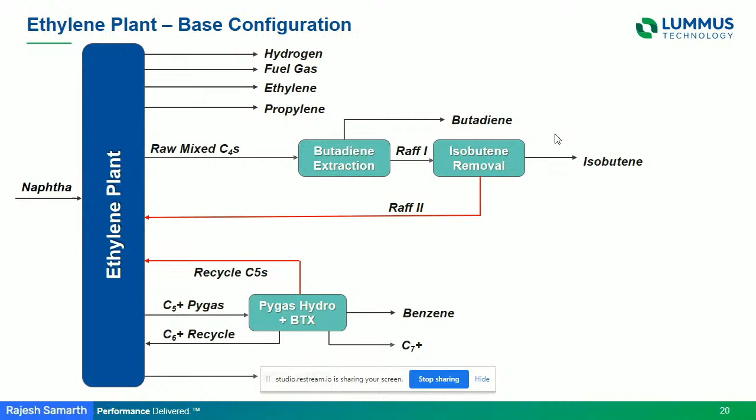Now I'm coming back and showing you the same base ethylene configuration. Let's talk about how the dimer OCT can be integrated here. The concept is simple, it's the same OCT concept. Here, what I'm saying is that now I want to make significantly more amount of propylene. So let's say I don't have sufficient amount of C4s to do this. If that's the case, I can take some amount of my ethylene, put it through a dimerization process, and make normal butenes from this ethylene. Then I'm feeding ethylene and whatever C4s and C5s are available, all of that to the OCT unit. That allows me to significantly increase my propylene production.

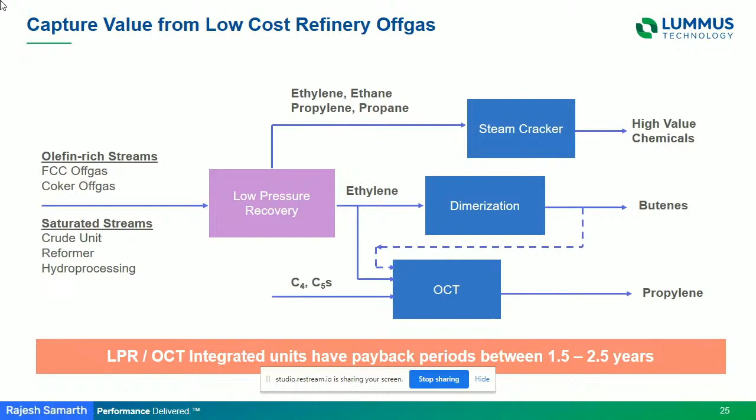Now let's talk about how this process can be integrated in a refinery. Again, the concept is the same. All I'm saying is that a refinery, especially FCC off-gas and coker off-gas, has ethylene, ethane, propylene, and propane in it. So we can use low pressure recovery to separate it from the others. The simplest thing would be, if you have a steam cracker, you send everything to the steam cracker. As opposed to that, you can use a low pressure recovery unit to separate the ethylene, and use the same route. You can go through dimerization and make C4s from that and C2s, and with the olefin conversion unit, you can make propylene. These units are also operating currently, and they are showing very attractive payback periods of 1.5 to 2.5 years. So you're taking very low value refinery off-gases and converting that to propylene, both ethylene and propylene recovered.

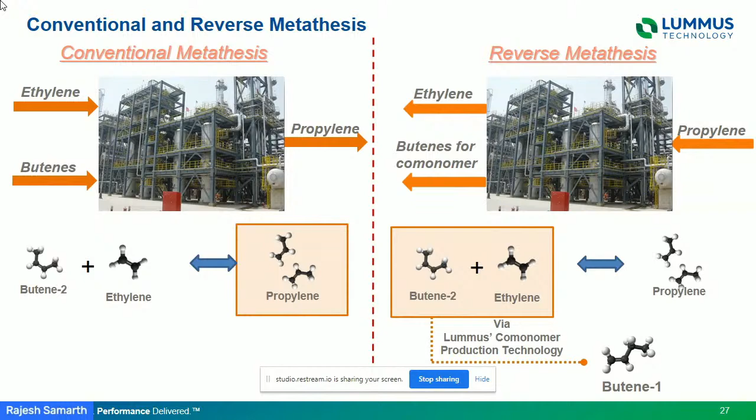So this is the last concept I'm going to talk about, the reverse OCT. Instead of doing ethylene plus butene to make propylene, I'm starting with propylene and making ethylene and butene. Why can I do that? Because on the same catalyst, I can do this process since it's an equilibrium-limited reaction. So I can just change the operating conditions and go the reverse way. Let's see, starting with the same diagram we had earlier. In reverse OCT, all you're doing is taking propylene, or part of the propylene, and making more ethylene.

So you can make more ethylene, and what happens is that you can also reduce your naphtha consumption. So when would you do that? When your propylene prices are really depressed, you can make more ethylene out of it.

The other thing you could do is, instead of recycling the C4s back, you can use that to make more butene 1 and butene 2, because equilibrium is more favored towards butene 2 than butene 1. But we have this technology for co-monomer production which reverses this equilibrium at different operating conditions, favoring butene 1. Butene 1 is a high value comonomer, so you can use it for that as well by doing that integration.

So now, in summary, the olefin conversion technology is a low OPEX and low CAPEX process to make propylene on demand, an on-purpose technology in a very attractive manner. But this depends on the relative price ratios of propylene to ethylene. Its integration with an ethylene plant is very easy.

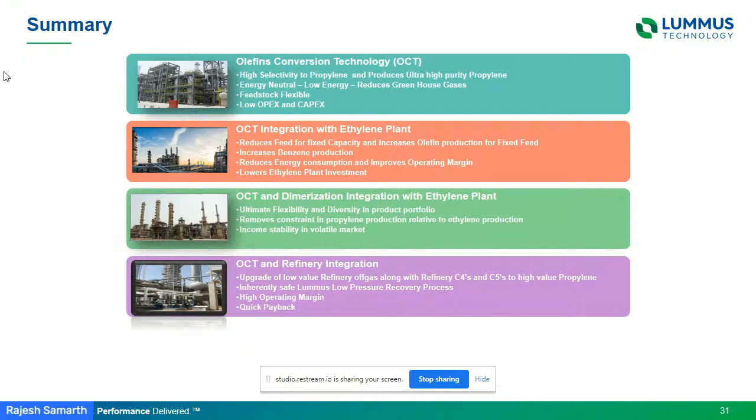In refinery, it is also simple. You can have this process as an add-on to make a very valuable product. This would be like a small niche example of refinery-petrochemical integration.

And then there is reverse OCT. The beauty of this is, if you have made some pre-investment to allow for reverse OCT, you can operate your plant either way, because you never know how the prices of propylene and ethylene will be in the future. So depending on that, you can operate the process in a forward manner or a backward manner and maximize your ethylene or propylene.

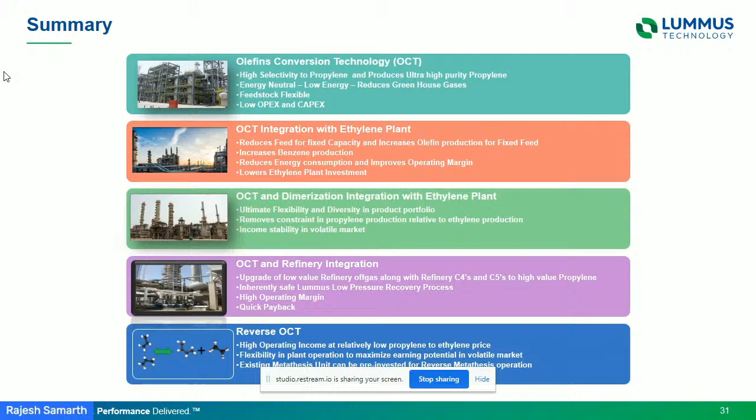So, that's all I have. I hope you found that interesting. Thank you.

Thank you, Rajesh. Again, we showed how the process gives ultra low energy and maximization of yield of the target product. Further, there are a number of integration possibilities, and configurations were also discussed. I'll quickly go to, there are two questions for you.

One is asking that, unlike competing technologies which are feed agnostic, here you are dependent on naphtha requirement, and the energy requirement is coming from the naphtha cracker. So these are the two observations. Would you like to respond to these two?

Yeah, so it is feed agnostic. You can very well make it work in a mixed feed cracker as well. Actually, what is happening is that the more you go towards lighter cracking, whether it's LPG or ethane, your production of propylene really suffers. It goes down as your feedstock to the cracker becomes lighter. So in that case, it is very, very useful. So when I talk about the improvement in operating margin and reduction in energy intensity, yes, that is happening for the overall cracker complex, for the amount of propylene that you're producing.

Yes, thank you, Rajesh. I think that's all the questions. We are already 3 minutes short on time.

So I will just sum up by saying each presentation presented various options available for technology innovation, the new innovations coming, small margin improvements, what you can bring to maximize product demand. That is a major theme covered across all the presentations. And these are all upcoming technologies. Hopefully, whoever has listened can take it forward by applying it in their own configurations. Thank you very much to everybody for patiently listening. And I hand over back to the host.